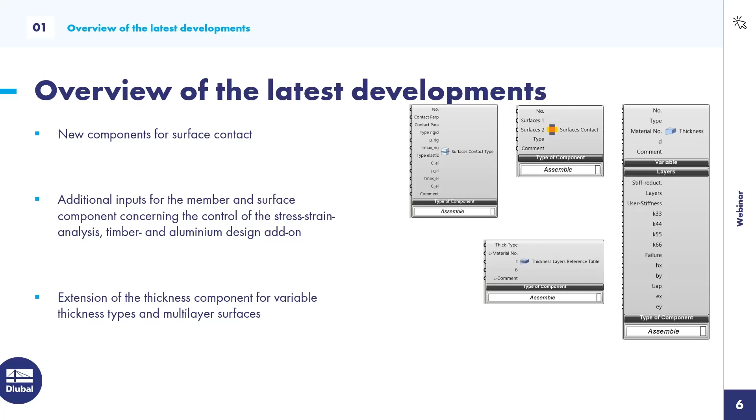The last feature I would like to show is actually related to the installation process of Rhino. Let me show you Rhino 8 here. In the past, the plugin could be installed via a specific folder in the RFEM 6 program folder. We changed it—everyone can install the plugin now via the Rhino package manager.

So if you go into Rhino and call up the package manager, you can search for Dlubal here, and you can see the Dlubal plugin with various versions. Important information: in case you're using Rhino 7, you should use the versions with the number 7 in front. And in case of Rhino 8, use the versions with the version number starting with 8.

For today's webinar, I'm using an internal version, but you can do the exact same algorithm in the current customer version of the plugin.

All right, let's switch to the second chapter of today's webinar, the live demonstration. To give you a feeling for what I'm doing in Grasshopper, I would like to show you the final structure first in RFEM, and then hop right into Rhino 8.

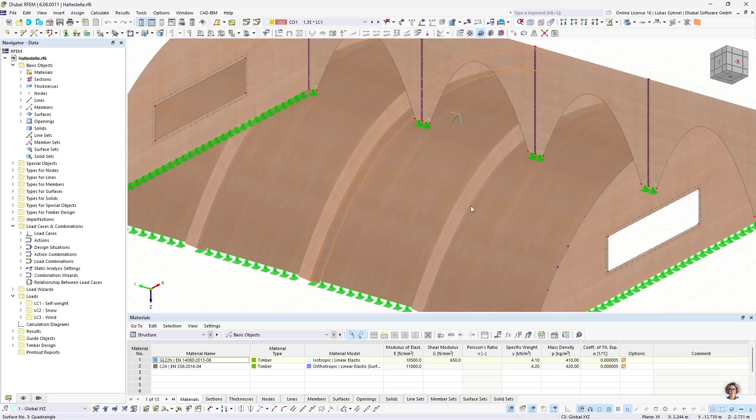So you have here these CLT wall, slab and wall elements, and inside some additional timber beams that support the roof, and on the front some openings to go to the train, and on the side some windows to see if the train or bus is coming. Obviously a made up example, but it serves the purpose of today's webinar.

I would like to show you the workflow and some new components. We have some line supports on the bottom, and additionally some line hinges, because CLT panels are usually connected hinged. So we need the line hinges as a tool here to have the proper force transfer.

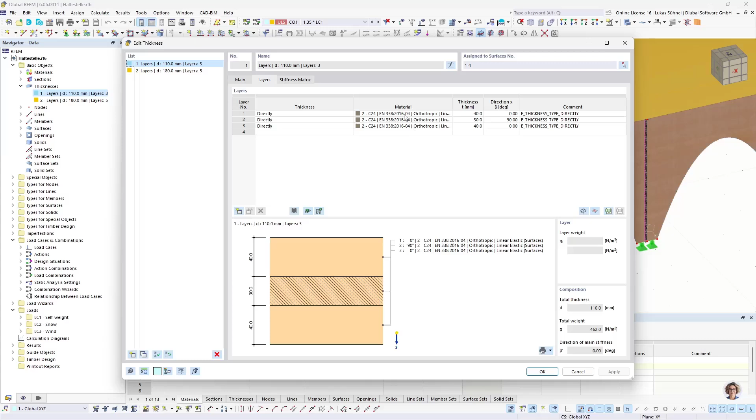That's also the most tricky part of this whole algorithm. I will explain it afterwards. Apart from that, we have, of course, our new layer thickness types in here, in which we then define the layers individually.

All right, that should be it as a rough introduction of the structure. Let's go right into Rhino 8, and here I will do it in a way that I put Rhino to the left and Grasshopper to the right in a second. One more little overview for you, what I will do now or in the next hour roundabout.

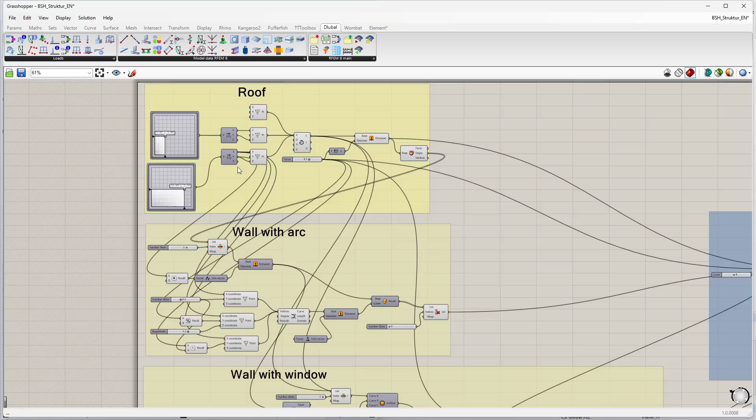I will model or create this algorithm here. We start with the Grasshopper algorithm, where I model the roof of the structure, then the walls with the arc, the wall with the window, then some data management, copying and so on of stuff, collecting my objects, the surfaces, the lines that I will use again afterwards.

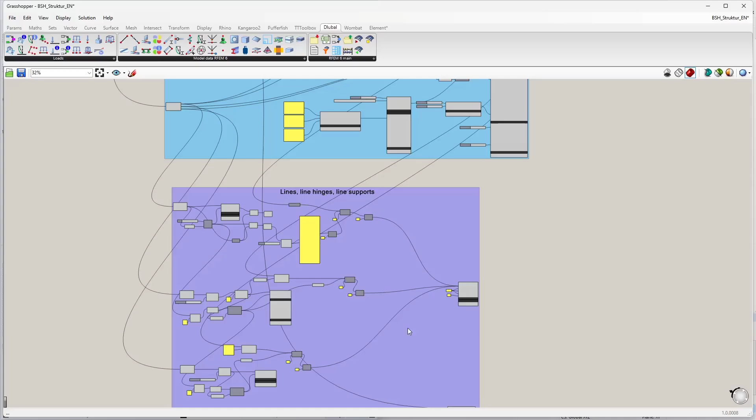And then the connection to RFEM via our Dlubal plugin. I will create materials, sections and members, thicknesses and surfaces, and last but not least, lines, line hinges and line supports. All of those components then will be connected with our export component, and we get the structure in RFEM 6.

All right, so let's create a new file in Grasshopper, move it to the right hand side of the screen and start with the modeling. As I said, I would like to begin with the Grasshopper algorithm. So I need a plan how to model that, and I will start with the roof.

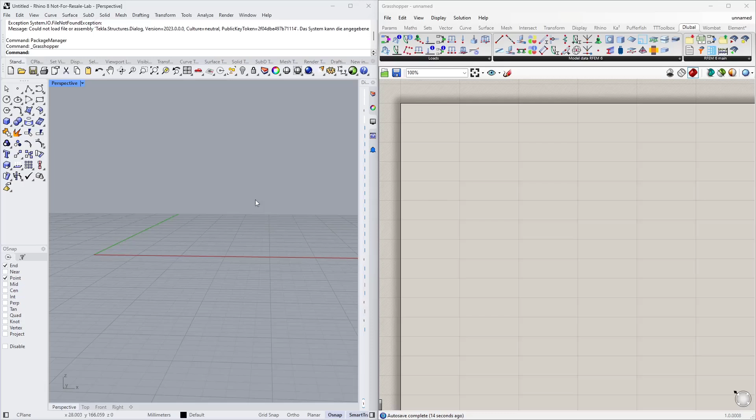The roof was curved, and therefore I need some kind of a curve with the interpolate component. The interpolate component requires the nodes. You can see it basically on this little icon here. You need to define the nodes and then it will interpolate a line or a curve.

And therefore I need 3 nodes and I use the construct point component for that. The coordinates of those nodes should be defined with MD sliders. This MD slider's properties will be changed a bit, so from 0 to 10.

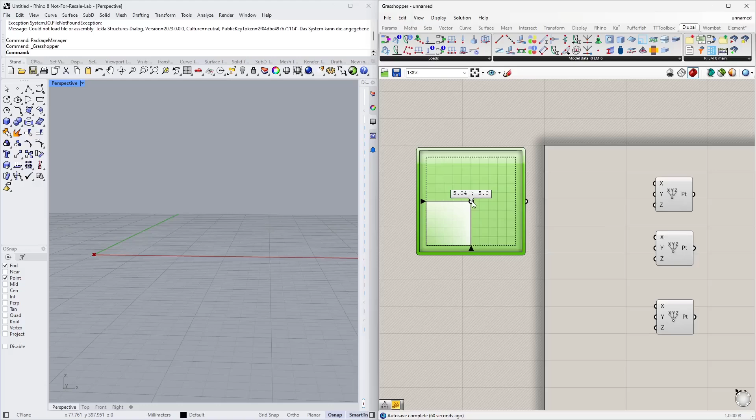So with this slider I can define basically a node, a coordinate x, y, z. Z, however, is always 0 here, so I change x and y coordinates by moving this little dot. Now my curve will be in the xz plane, therefore I need to deconstruct the node that I get here.

So I deconstruct the node and I construct it again, just using different coordinates. So x should remain as the x coordinate. The y coordinate, which I can modify here, should be the z coordinate. So you can see now, actually that's already the second node, my bad.

The first node should be at 0, 0, 0, in the center of origin. The second node, which I can modify now with the MD slider. And the third node should also be modified via an MD slider. Same logic, Y should be Z.

And now I can define this arc. Let's pick some proper coordinates. And now I can connect it to my interpolate component and I have a curve. So that could be the shape of my structure, for example. Now I need a surface, so I can simply extrude this curve into the y direction.

And yeah, I want to define a distance via a slider, so I define a slider from 1 to 5, for example, using the metric units here in my head. So now I can...

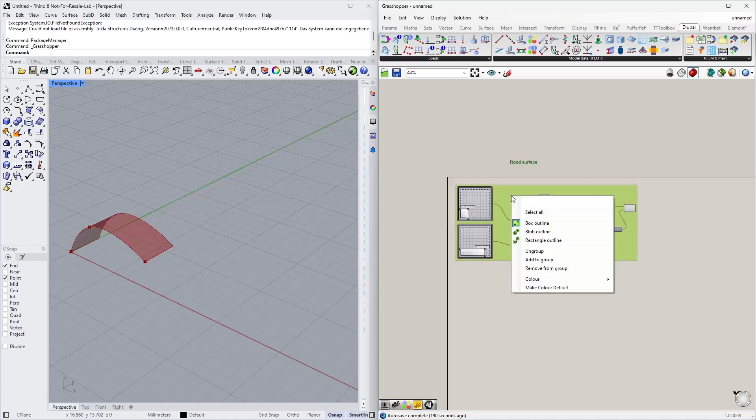All right, so second part is the wall on the front. Let me show it again in RFEM so you can follow easier. I want to create this wall now with the arc-like opening. So what I need for that is I need this line here, and I want to extrude it into the Z direction. To get access to this line, I will deconstruct that surface.

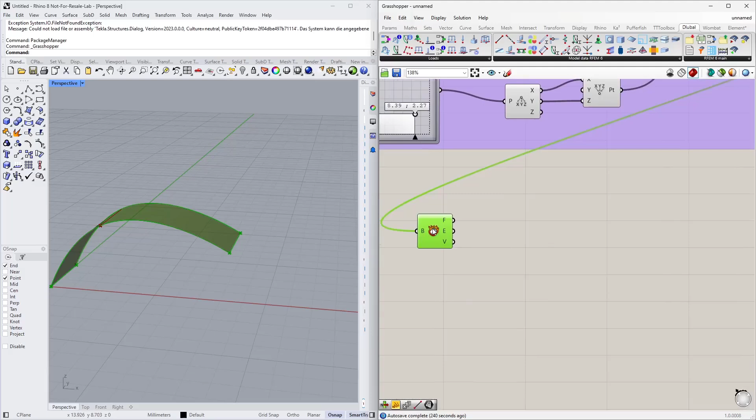Therefore I have here the deconstruct brep command. I link it to my surface. Now I have here the faces, the edges, and the definition nodes, and I need just one of these edges, so I take a list item component, connect it here, then define the little slider to select the line from that list. Let's see which it is.

Index 0 is the one on the end, on the bottom. Index 1 is this arc. Index 2 is the line that I need. Alright, so I have this single line in this component now, and now I simply extrude it again in the Z direction.

And we can already see it is the wrong direction. So I probably need to multiply it by -1, and the coordinate itself comes from my arc or my curve that I defined in the beginning. It's the Y component or Y coordinate of that node. So obviously the Y coordinate here, and multiplied by -1.

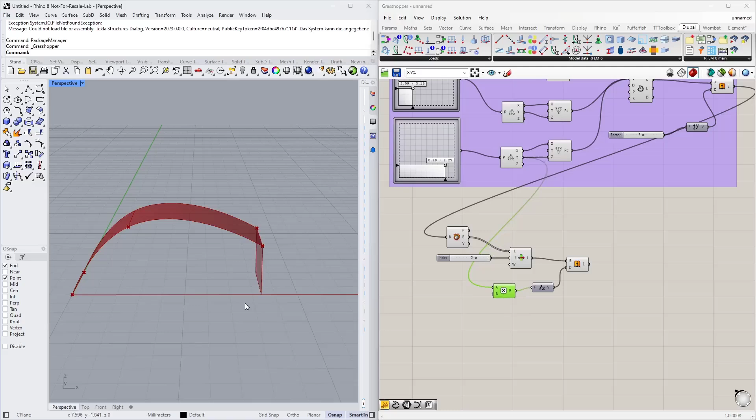So we make a little multiplication component, and then it always has the right height. Yeah, so even if I play with my MD slider, the wall always gets the right height at the end of the day. All right, that's the first part. Now I need the opening.

For the opening, I also use the interpolate component again, and I need again 3 nodes. All right. Yeah, sorting can be done at the end of the day. All right. So where should the first node be? Basically, all of the nodes have the same X location as the wall or the end point of my curve. So the X location or the X coordinate is always the coordinate from the last point of my curve.

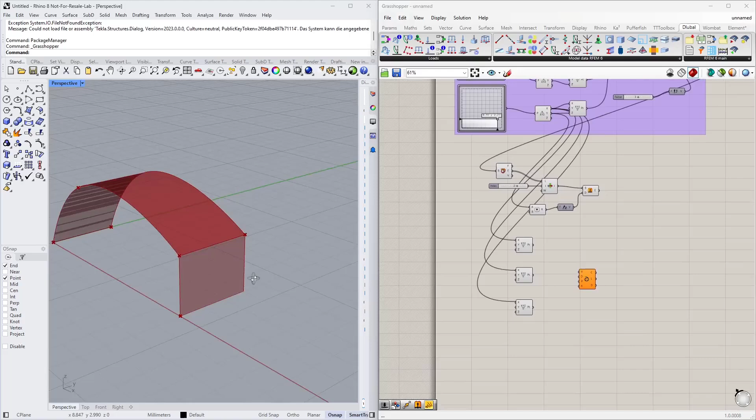And now I need to modify the Y and the Z coordinates. The first node should only move slightly in Y direction, so I make a small number slider, and I want to have floating points, so I change the type of it and connect it to the Y coordinate. So this distance that I define here via this node is basically the length of my wall support on the bottom.

The second point should be in the center. Center basically means the dimension of the extrusion divided by 2. So divide by 2. Link it to the length of the extrusion, and that's my Y coordinate for the center point. And I need a number slider to modify the Z coordinate. All right. Maybe also with floating points, so like that.

And the last point is again on zero, on the bottom of the surface, and it should have the same distance as the first point. So again, I just do a little subtraction. I subtract my required support length from the extrusion length. That's the Y coordinate. So whenever I change the length of the support, it will change on both sides.

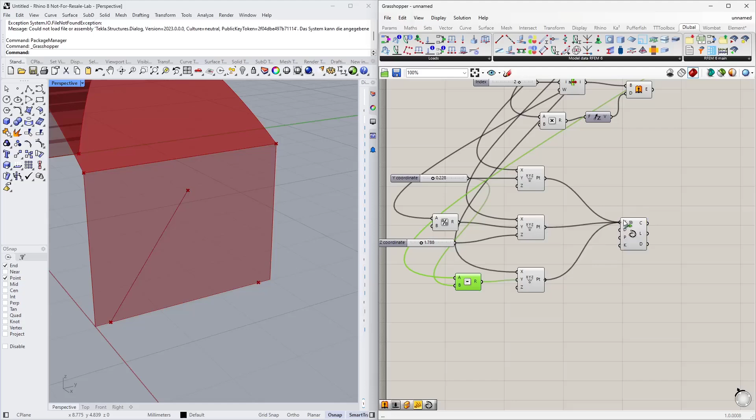All right, these are my 3 definition nodes for my curve. And now we can see it. The next step is, let's say, like a trim command. I would like to cut out this part of the arc from the rest of the surface. I can do that with the component split brep. The base surface is this one, and the so-called cutting shape is a surface. So I need to extrude my arc again into X direction to get a surface for it.

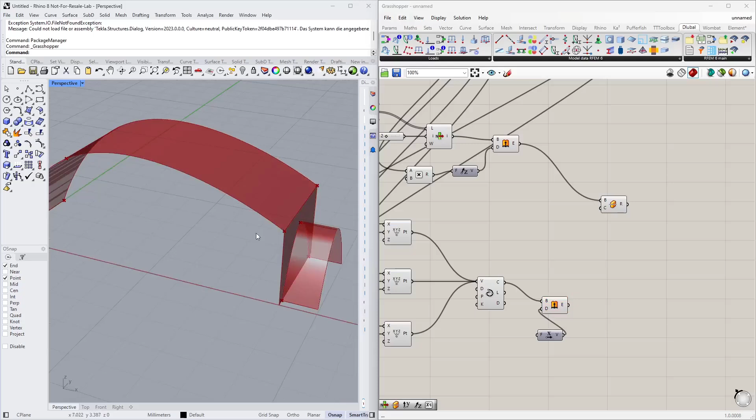So actually extrude first, extrude in X direction. Yeah, just any surface, and now I can use it to cut the original shape. I get here 2 surfaces now. I just need one of them. So again, a list command to pick one of those indexes, and a little slider to select the right one.

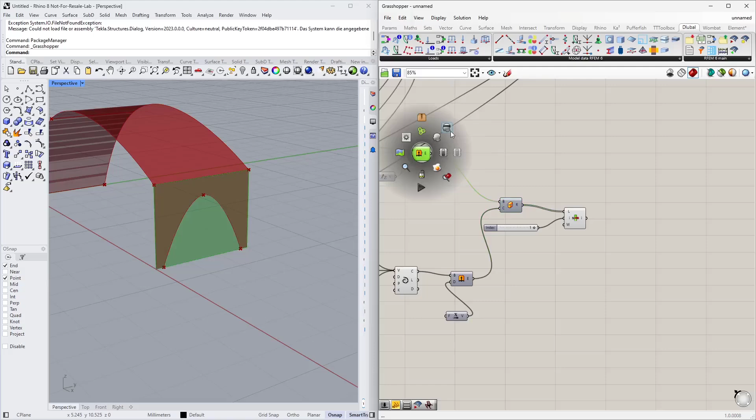So index 0 is the surface of the opening, and index 1 is the remaining surface, which I want to keep. Let me hide some of the other objects to see the result of my little algorithm. That's the remaining surface, the one I need for later.

So I already finished the second part here. Again, I could give it a name - arc, surface, whatever - just so I can easily understand what I'm doing even a couple of weeks later.

And now the last surface is the surface in the front. To create that, I would like to use the edge surface component. I only have to define the boundary lines. One of my boundary lines is, of course, the curve I defined in the beginning from the roof. And the second curve for my surface should be this side line of my front surface.

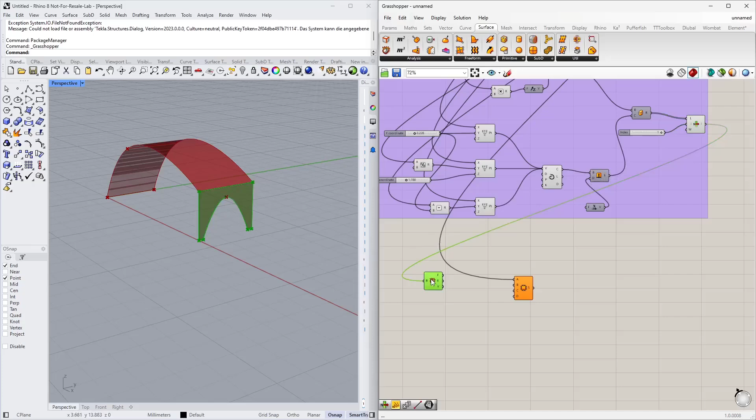So again, I deconstruct this surface here in the front, and I select, or try to select, this line here on the side, again with the list item component.

Let's connect a slider to it, and now let's go through these lines to see which of them it is. Oh sorry, the edge lines, of course. So that's the other side. Yeah, now I have it indexed number 2. That's the line I need.

So I connect it again to that surface component, and I already get the final shape. So far so good. Now I need to cut out a rectangular hole in here.

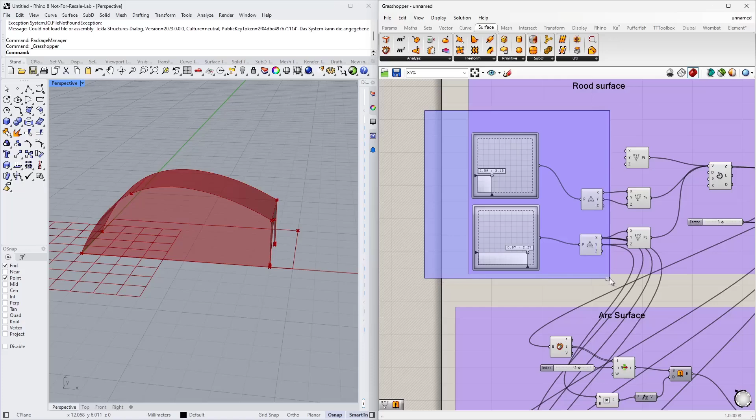Same logic as before. I will create the rectangle in this case by 2 points, A and B. Then I extrude the rectangle and cut it again from the original surface. These 2 definition nodes of the rectangle can or shall be defined again via an MD slider.

So I just copy some of those things here, copy, paste, and I will reuse it down here. This time, actually that's already okay. I can connect them as definition nodes for my rectangle.

The rectangle can be placed in any plane, as you can imagine. So I can define the plane by setting it graphically, or in the Rhino log, or however you call this area on top. And I would like to have the rectangle in this ZX plane. Okay, that's now in the right plane.

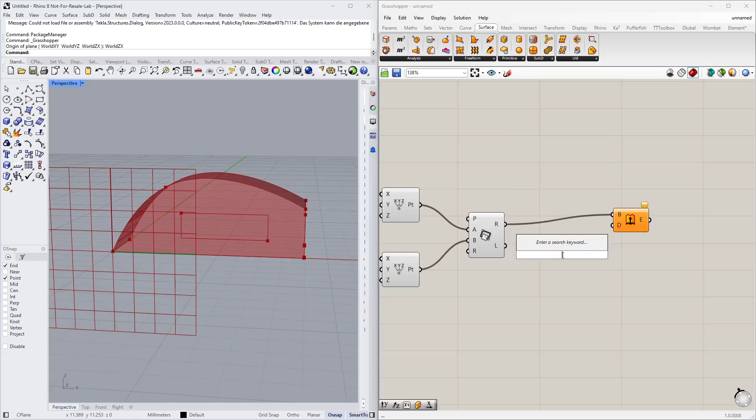Let's set some proper coordinates for the rectangle. So maybe that's the size of the window that I would like to have, and now I have my rectangle here. Again, I extrude it into the Y direction.

And now I can use the split command again, split brep, to cut out a hole. Let me copy the list item that I defined on top here. Again I want to keep only one of those surfaces, and this time I think it is index 0. Exactly, yeah. So let's hide some stuff to see the result of our work here.

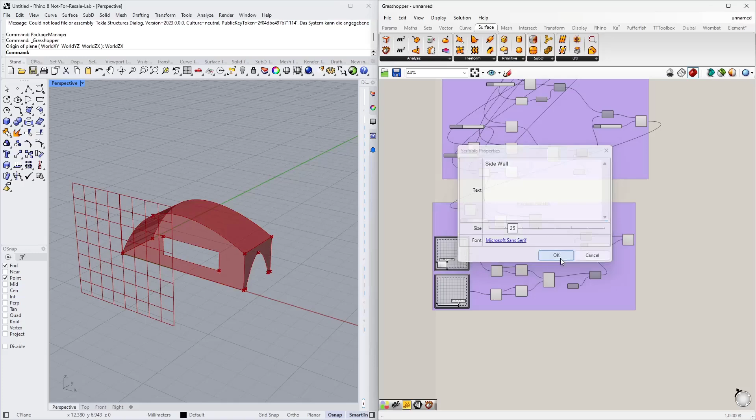That's the remaining surface with the opening, the rectangle opening. All right, that's already the basic geometry that I need. And now I can copy this stuff - sidewall, let's say. Okay, now let's copy the surfaces.

That can be done with the move command or move component. And which objects do I want to copy? Of course my roof surface and my front surface or front surfaces. And the default is set, as you can see. Yeah, it's copying it in the vertical direction, which is not correct.

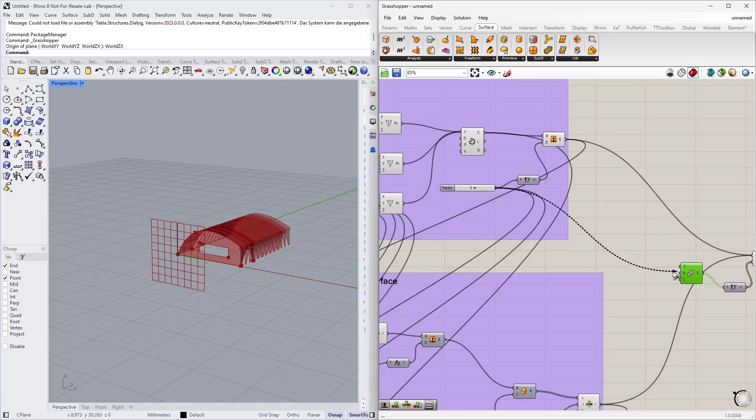I want to copy them in the Y direction, and I want to copy them multiple times. For copying something multiple times, you can combine a move command with the series component. And as a step, I would like to use the extrusion length, to have them placed next to each other.

Now I can control the amount of copies with a small slider - let's say 4 copies. All right, that's a big part of the structure. Now I only have to copy the front surface to the end, so I use another move command for that.

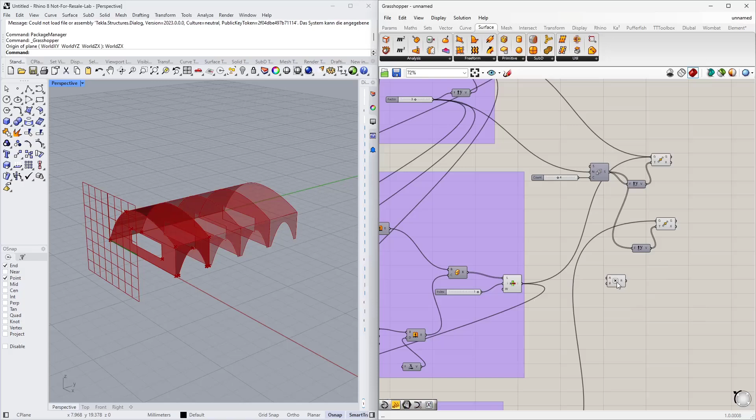I copy this surface—only one time, of course, not multiple times. The end distance for this is actually a little multiplication: we simply multiply the extrusion length with the amount of copies, and that's the length we need to copy it from the front to the end.

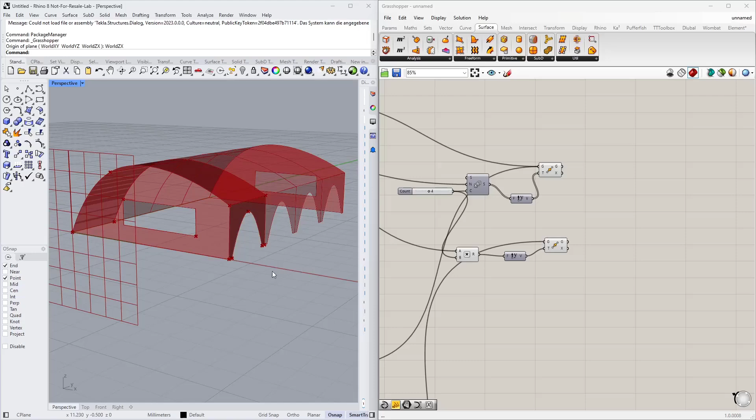Okay, so far so good, the geometry is done. What I need now is a bit of data management, because thinking of the RFEM 6 connection, I need a collection of lines on the bottom, all of those down here, because on those lines I'd like to assign a line support, and I can use these lines in my line support component to export it to RFEM 6 afterwards. Additionally, I need these 3 internal curves, because I want to assign a member or cross section to them, and maybe also a collection of all the surfaces that I have.

So maybe let's start with the curves for the beams. How do I get those? They are basically inside that component, which contains all the surfaces from the roof and from the front. Now, if we take a look at the data in that component, we see that it has 2 groups.

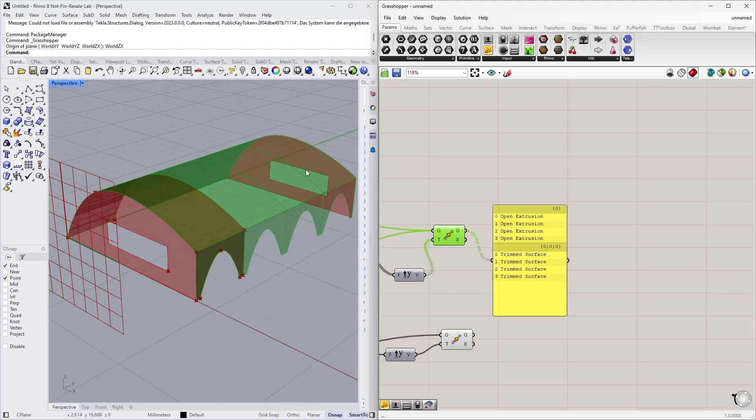Let's call it group 1, the 4 open extrusions—these are my roof surfaces—and in the second group, my wall surfaces. So what I can do here is explode this tree and get access to each of these branches. First branch, second branch. The first branch, as I said, contains the surfaces of the roof, and I can deconstruct them again.

So you can see it here again—those are the surfaces, and of course the boundary lines and so on. Now I would like to select only these internal curves, so basically just one of those lines per surface.

So I need again a list item component from my edges, and let's see which index numbers it will be. Index 0 is the lines on the bottom—I need that maybe later for my line supports. I'm looking for the roof curves, and index number 1 is the one that I need. It contains these curves, however it contains 4 and not just the 3 that I need.

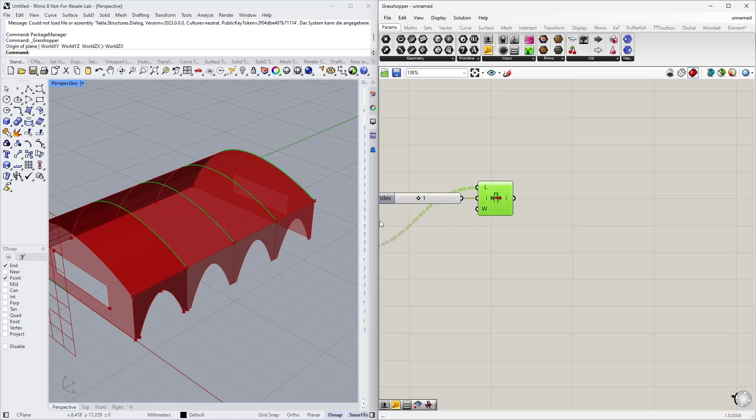So what I can do now is get rid of the last index from that list. Currently it is not a list, it is, let's say, a tree—on each branch of the tree I have 1 curve, but I can make a list out of it by flattening this tree, and now I remove the last index.

And it can be done by using the cull index component. The last index can be defined by a panel with the -1 value, and the remaining lines are the ones that I need for my beams.

So let me collect that in an additional component so I can easily reuse it afterwards. Maybe again a little comment here: curves for beams.

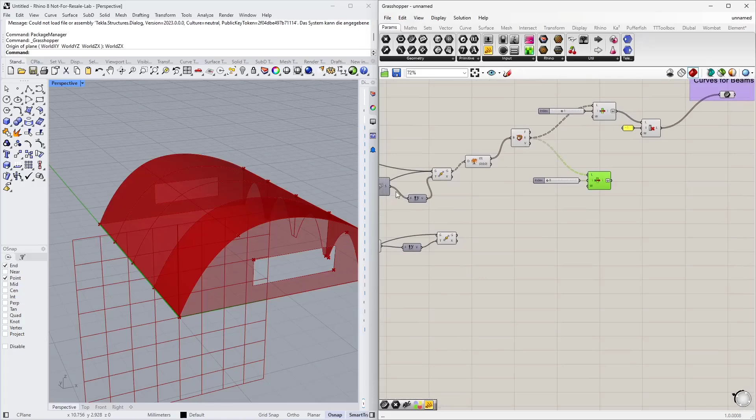Now, the second part should be the curves for my line supports. We already saw it in that component—here I can select, let's say, the curves on the bottom of those roof surfaces. It was index 0, so that's already one part for my line supports. And the other bottom lines are included in the wall surfaces.

So basically I can copy this part, connect it to my surfaces here in the front, and now look for the index number of those walls—which of those lines are the ones on the bottom? So I scroll through that: index number 1, as we can see. Now my slider isn't long enough, but I can tell you that it's index number 5. So I need index 1 and index 5.

So I create a little list, 1 and 5, and connect it to that component. This list item gives me now 2 lines, index 1 and index 5, and hopefully you can see that it's the line on the bottom, on the right and on the left side.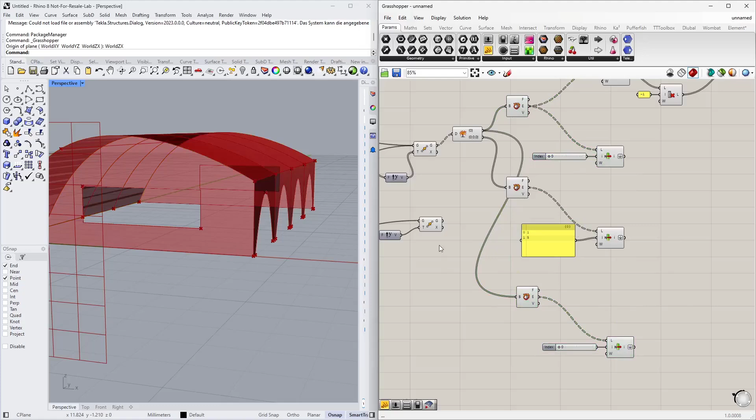Now I need the bottom line from the side surfaces. Same procedure—I copy this part again and connect it to my surfaces: the front surface, which is down here, and also the copied surface from the back. From both surfaces I need 1 line.

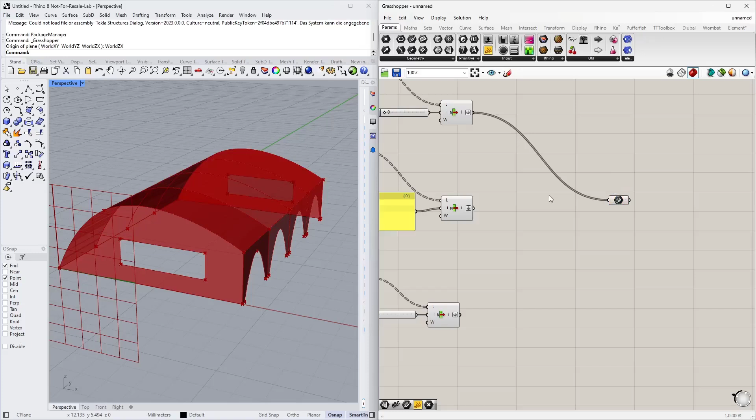We can already see it is index 0, so in here I have now 2 lines, and these are the lines that I need. I can collect all of them in one component again—just connect them to the curve component, and that component now contains all the bottom lines for my line supports. So again, give it a little description: line support lines.

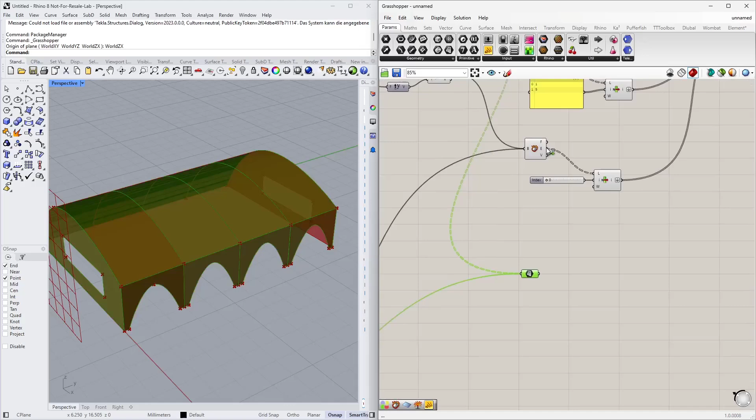I also collect my surfaces in a surface component, which contains most of them, where I copied them. Additionally, I have the front wall and the wall on the back, which is in here. So this surface component now contains all surfaces.

So far, so good. Now, the next part is the connection to RFEM 6. For that I need my Dlubal plugin. Let me open Grasshopper for a second.

The Dlubal plugin will show up after you install it, and it is divided into 3 parts. We have the model data group, which contains most of the basic objects: nodes, lines, members, surfaces, materials, sections, also components for solids, for thicknesses, supports. I think most of the stuff that you need is implemented in here.

We have another group called loads. In here you have components to create load cases, load combinations, but also the loads: node loads, line loads, member loads, surface loads, but also imperfections, in case you want to assign them as well.

And the last group contains general components, for example the export component, import component, a component that allows you to run the calculation of RFEM 6 via Grasshopper, or other components. For example, I use in an internal version the global mesh setting component.

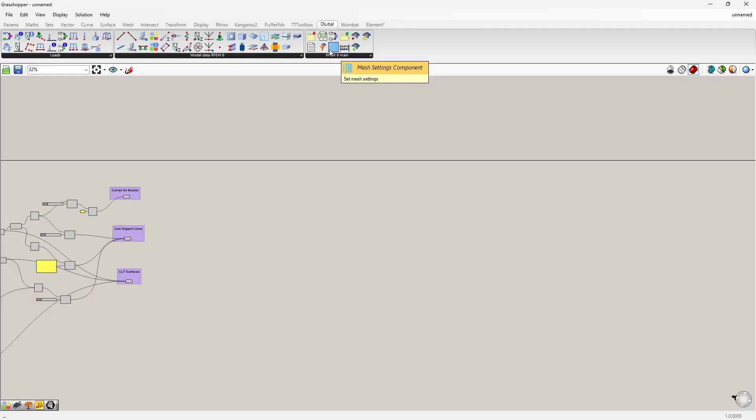All right, how do we start? I think RFEM gives us a nice hint here. The data navigator in RFEM shows us the basic objects and then specific object types for nodes, and it's kind of the logic that you use when defining your structure.

First you define materials, then the sections and the thicknesses. Then you continue maybe with members and with surfaces and solids and so on. And the same logic we use in Grasshopper.

I start with the definition of my materials and sections. The material component can be found here, and a material can be defined by the index number that it should get in RFEM 6 and the name.

The name ideally equals the name of this table down here, so you can define your material in RFEM and copy the name. By the way, to get the full name, check the program options and see if you have the full section and full material description activated in here.

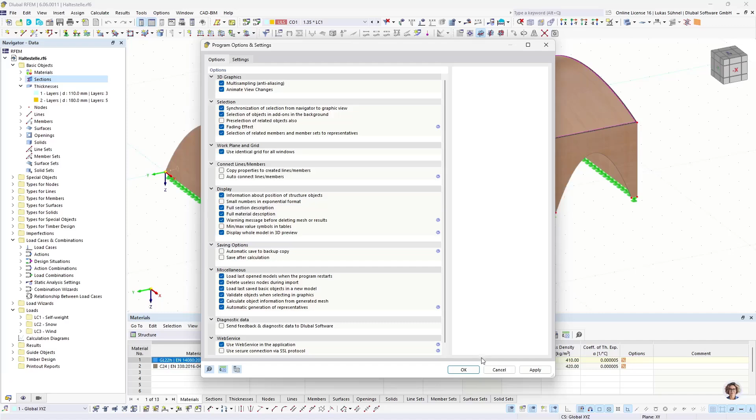If you do not have this option activated, you only see GL22H — the code-related part of the name will not be shown. But to have a clear assignment of a material, you also need the standard. So we can copy that name and paste it into Grasshopper.

Alternatively, if you had previous projects and already defined materials and sections, you maybe already created a little library of materials and sections that you use again and again. And that's what I did.

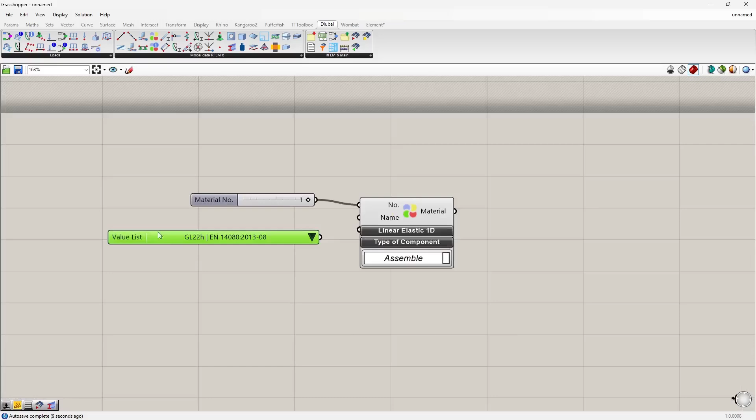I defined here a value list and put my own information into that value list. You can do it by editing this value list and inserting the names into it — that's the name it shows here, and that's the name which is behind that little description. It's identical for me here, but you can simply copy these things.

Then you select the material that you want from that little list and assign it to the name input. And that's all you need to do.

I copy my material — I need a second one. Make sure you change the index number. Then I select here the material C24. The first material is for my beams, and the second one should be for my CLT surfaces.

And for surfaces, we have to use the orthotropic 2D material model, or that's what I want to use at least. So I use a value list to read the options of this material model input and select orthotropic 2D.

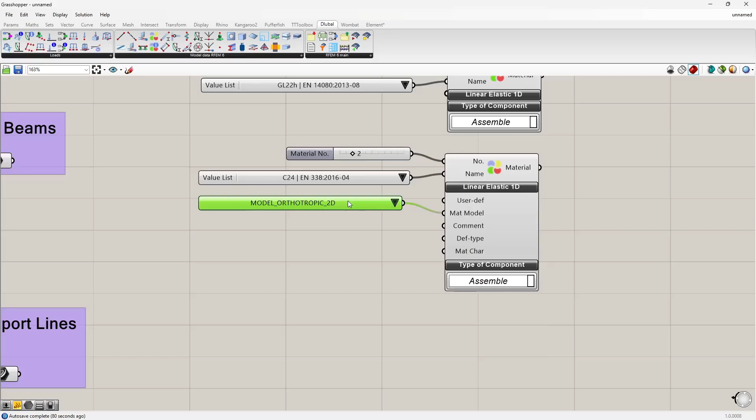All right, next step should be the definition of a section. So we have the section component for my beams. Again, I assign a name, a number, and I have to assign a material and the name. The material I can link directly from the material component to the section component.

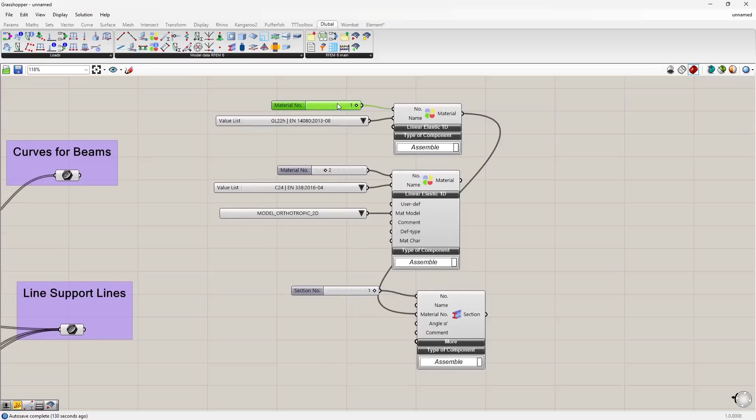This step can only be done if I define the index number first, because what we expect in this section component is the material index number, 1, 2, 3, 4, 5. To transfer it from that component to this one, I have to assign it here first. If I don't assign it, this connection won't work. That's why, personally, I define usually all these index numbers for all my components, so I can link them together. Now the last thing is the name.

The name is quite easy. It's RM1, rectangular massive section, and then the width and the height. I could copy the string and paste it into Grasshopper, or I build it parametrically. The name is just a bunch of strings combined, basically, text brackets, and the name consists of the part RM1, then a value for the width of my section.

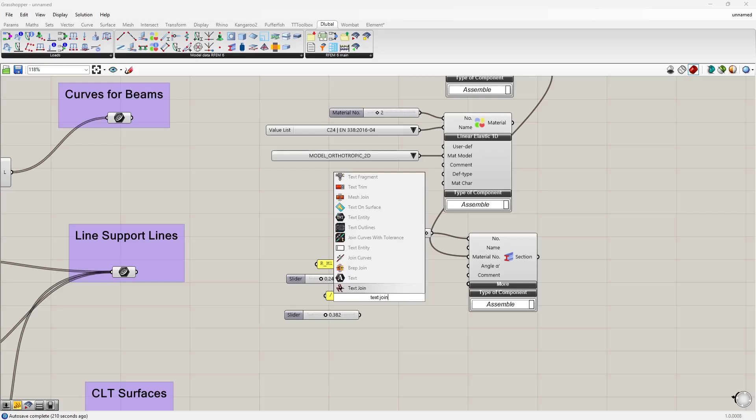And I use here a slider from 0 to 1, I'll explain it in a second. Then the next part of the name is the slash, and then another slider for the height of the section. All these parts of the name can be joined by a text join component. You just plug it into this input here, and you get the name, or you get one string out of it.

Let me show it. Here we are missing the space. Okay, so that's now the name according to RFEM. There is just one little difference: you can see here I'm using, let's say, meters, in my mind 0.24 meters, and not millimeters as it is shown in RFEM. This has the following reason.

The Grasshopper link is based on our web service, on our API, and this API expects SI units. So I have to define the dimensions of my sections in meters, so that I get the right size in RFEM. Therefore a scale between 0 to 1. Now I can link it to my name input, and the section is done.

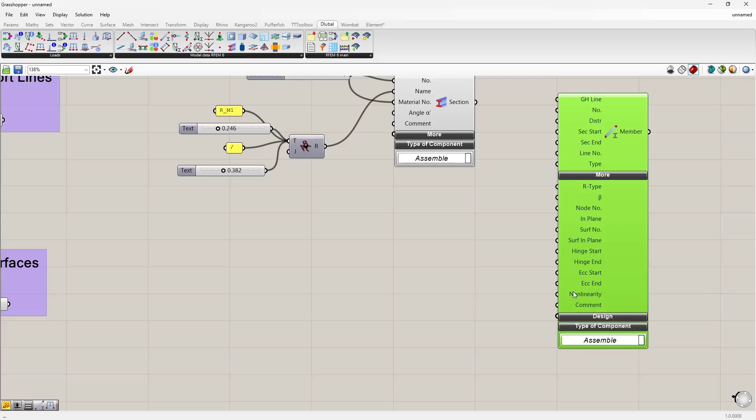Last step for this first group is the member component. Let me show that too. A member component with some basic definition inputs. Under 'more' you can find options for hinges, eccentricities, nonlinearities or rotations for the member, and under 'design' related inputs. Let's start at the beginning.

I need the Grasshopper lines for my members, these 3 lines. Let me rotate the structure. These are the 3 beams, and I already collected them in here. These are the curves, and I connect them to my member component. The section should be this rectangular section, and that's basically it.

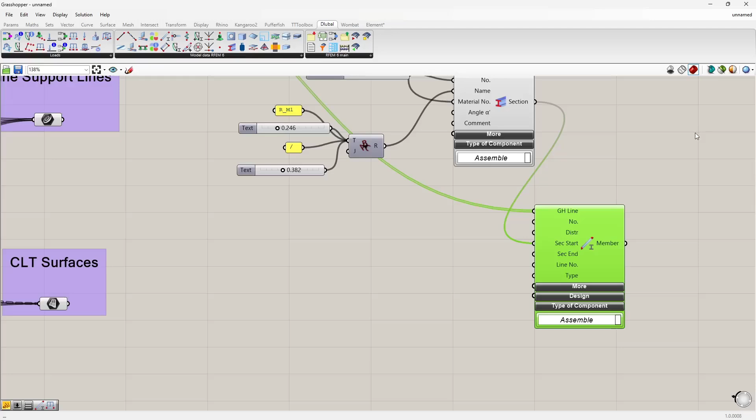There's just one thing I'd want to define in the member, related to the design. I have timber beams, and I would like to feed already some timber design related settings, so that when I export it to RFEM, I have most of the information already defined for the design, and I just have to calculate it.

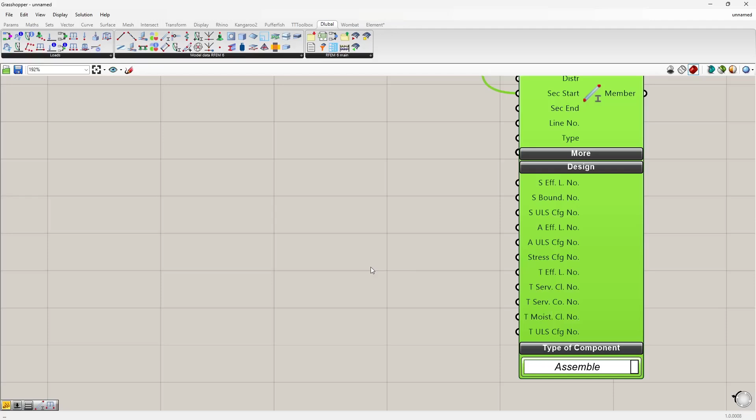So I have some inputs here, S usually for steel, A for aluminum, then T for timber, and for timber I can define the type of the effective length, or the index number of the effective length type, and the index number of the ultimate limit state configuration, or the index number of the service class. I can't define these classes in Grasshopper, but I can define the index number of the existing type.

And now you may ask, which existing type? We never defined them. That's where the templates come into play, and I will explain at the end of this webinar how it is working. So let me define these types. I used index number 1, and again, more details I will show at the end when I explain templates. So that's already my first part.

Let's group it: materials, sections, and members. Now the second part for my connection to RFEM are surfaces and thicknesses. Let's have a quick look again at RFEM.

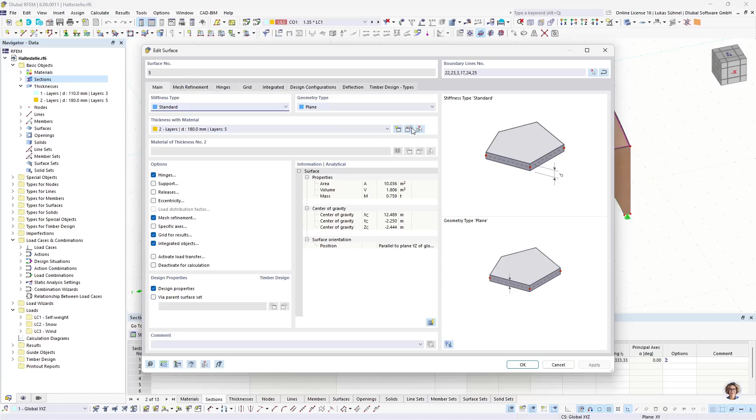So a surface consists of some main inputs, usually the thickness type: what material and which thickness is defined in here, and it will be assigned to the surface. So let's have a look into the thickness type itself. Here we have different types: uniform, for concrete slabs, uniform thickness type, variable, and also layers. In case of layers, we have a table included where we define each layer, the material, the thickness, and the direction of this layer.

Okay, that's what I have to define here, or in Grasshopper. So let's start with the thickness component, which we have here.

And the thickness component again needs a number or an index number. Then the type, I can use the value list for that. In 99% of the cases, the tooltip will tell you what kind of input is required. You can see it here, value list. So I connect it.

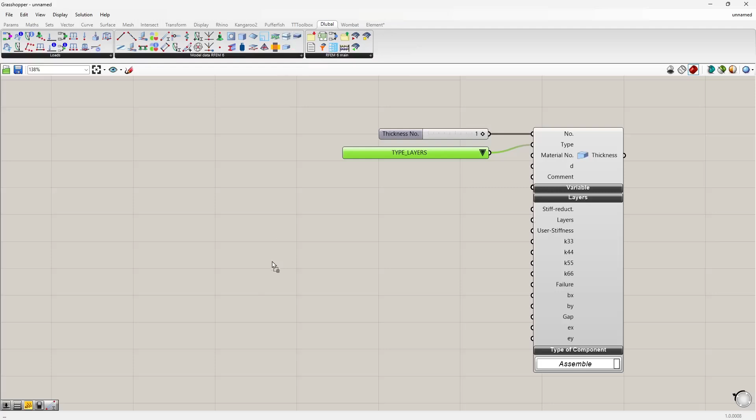And I can select here layers. In case of layers, I can open the layers tab in this component, and here I have the layers input. The layers will be defined in an additional component. Yeah, we had to split it up.

So in that additional component, I define the material, the thickness, and the direction. Yeah, this little table that I displayed in RFEM 6, this information will then be transferred to the thickness component. All right, the material should be material number 2, C24, orthotropic material model.

The thickness can be defined in a little table. Let's say 0.4, 0.3, again meters, 0.4. And that should be a list.

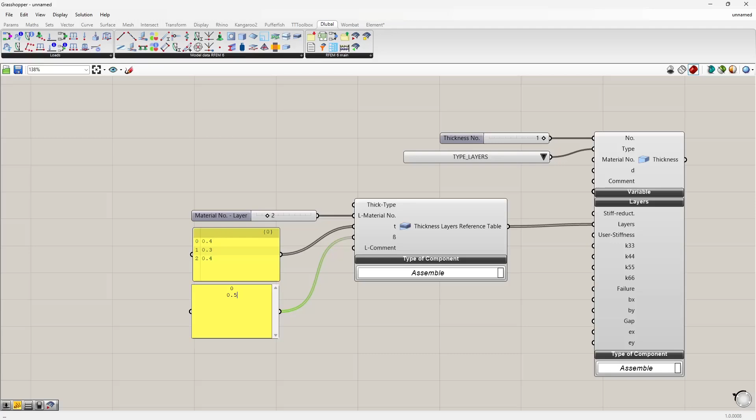And the same logic for my rotations. The direction of each layer should be 0, 0.5 multiplied by pi, 90 degrees, and 0 again. This is this little subtable which I showed in RFEM, and it is connected to the thickness component.

We have a lot of additional inputs in here. I can show them as well in RFEM. I do not use them today, but in case you want to apply a stiffness reduction to these CLT thicknesses, you can activate them with this button, and then you have access to these modification factors and additional options, and all of them are included in our component, as you can see here.

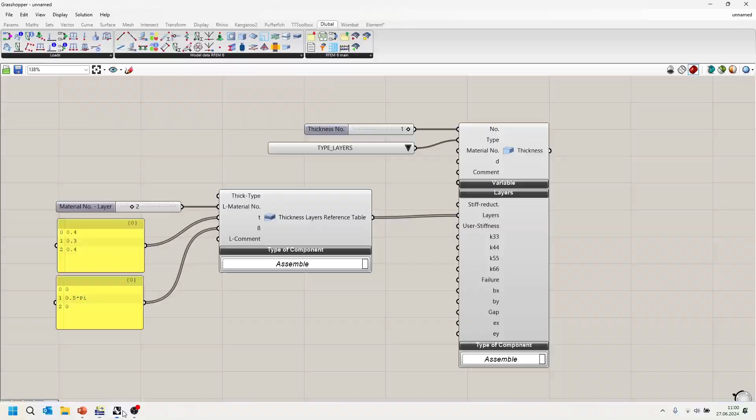So that's the thickness that I want to create. Now I need to connect it to a surface component, and the surface component expects additionally the Grasshopper surface.

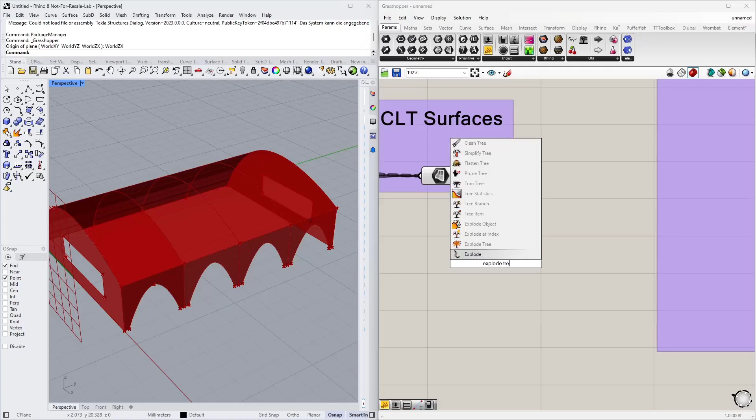Now I want to use that thickness type for the roof surfaces. That surface component here, let me show it again like this, contains all surfaces, again in a tree-like structure, as I showed before. There are 3 groups. My roof surfaces are in group 1, so what I will do here is explode the tree that I have, and use, since I need it later as well, the surfaces from the first branch for my surface component.

The last step here is the numbering. As I said, I tend to number all my surfaces, so that can be done with the series component. This number, the index number, starts with the value 1. So I define here the start index number as 1. The step is of course 1.

1, 2, 3, 4, and the amount of index numbers that I need is linked to the length of this list. I have here 4 surfaces inside, depending on how many copies I create in my Grasshopper algorithm. So the length of that list is basically the amount of copies that I need. I can count the length with the list length component and connect it here to the amount of copies. And now I get a list of 4 index numbers, 1, 2, 3, 4. That's what I need for my surface.

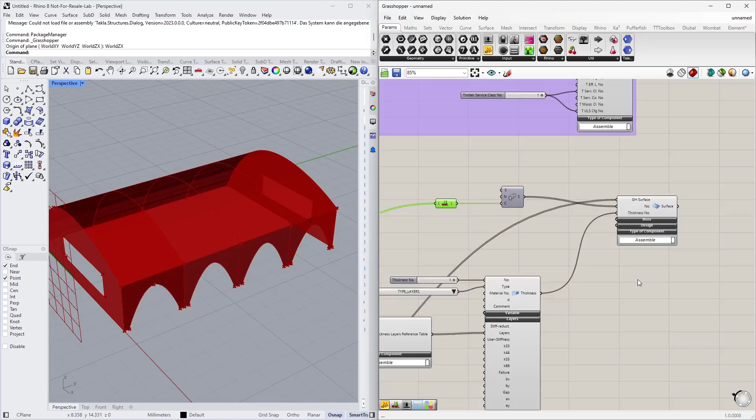That's the surface component. And now I need another surface component for my walls. So I simply copy all this stuff. Copy paste.

This time I want to use the remaining surfaces, so these are my front surfaces and these are my surfaces from the side, and I connect it as Grasshopper input.

Concerning the thickness for the walls, here I would like to use 5 layers, so I simply copy them. Okay, same for the directions.

And I need to change the index number, obviously, of my thickness. Yeah, that's the second thickness, so index number 2.

Again, the remaining part is the numbering of those surfaces. I will use a series component again, but I'm not going to start from index number 1 as I did before. I need basically the last index number from this numbering plus 1. So that's not difficult. The last index is basically, I can read it via a list item component, and I select here the last index, using -1.

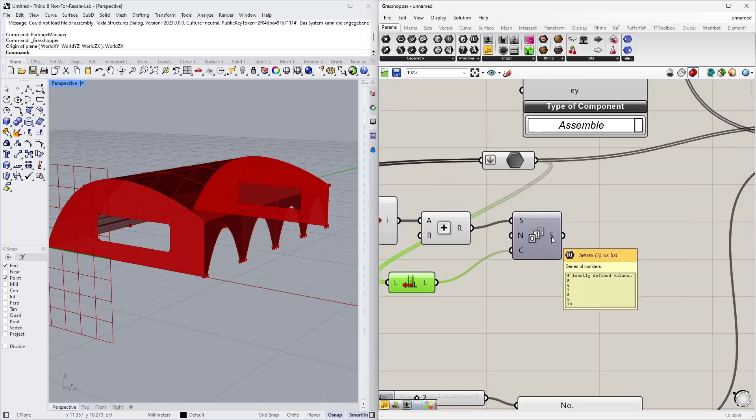Here it is, the length of that list is again the amount of copies that I need. So I have here the numbering 5 to 10. That's exactly what I need. 6 values for the numbering, 6 surfaces.

That's good. All right, one more thing I would like to define here is a mesh refinement. Why? Simply because the default global FE mesh length is 0.5 meter. We have here a distance of, what did we define, about 0.3 meters. So let's have at least 3 elements over this length here. I would like to use an FE mesh for those wall surfaces, an FE mesh length of 0.1 meters.

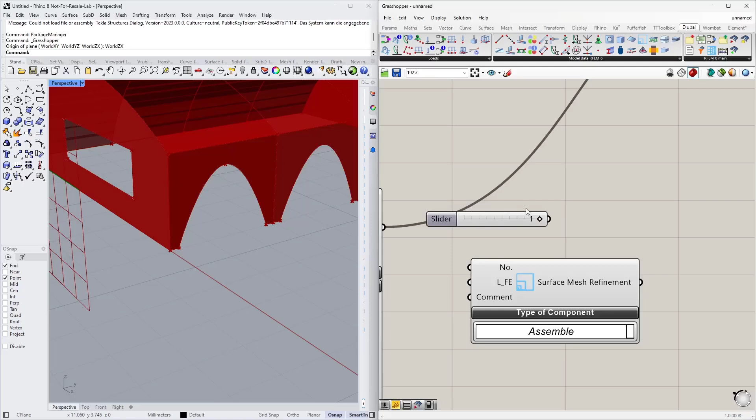Therefore, we have these mesh refinement components. Here's the surface mesh refinement component. I assign the index number and the required length, 0.1. All right, and I simply connect it to the mesh input.

Now, what I forgot also on the surface on top is those are timber surfaces, obviously. And again, I would like to define some things for the design afterwards, the service class and also the ultimate limit state configuration. Therefore, I assign here type number 1 for the ULS configuration, and the same here. Let's extend the design tab: ULS configuration, service class. All right, explanation will follow afterwards.

Now, this is the second big group for the connection to RFEM 6. And now the last part, which is related to the line hinges. This is the most tricky part, I would say, in that example. So let's have a look inside RFEM, how they are defined.

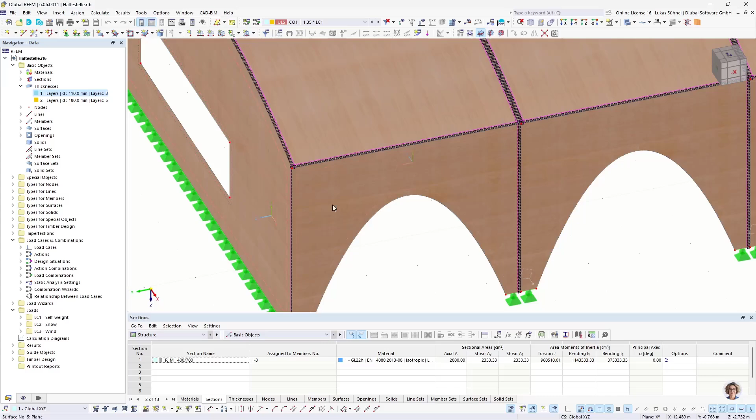Line hinges, as I said, control the force flow between surfaces. And we find them under types for lines, line hinges. Let's have a look. I have just one type here for all of the surfaces. And what we can control here is the hinge conditions, which force should be transferred and which not.

In my case, I simplified it a bit. I say it's just free about the rotation of the local x-axis. So basically along the line hinge, the rotation about this axis should be free, and the rest should be fixed. And then, which is easy to define in Grasshopper, that's not the deal, not the issue.

The difficult part is this string on the top here. How is it set up? It is set up in a way that we have the index number of the surface where we want to have a line hinge, and then the related lines. So for surface number 1, lines 2, 3, and 4.

For surface number 2, lines 6, 7, and 8, and so on. And this is split by a semicolon and a space, and then the next group of surface and lines comes. So somehow I have to build this string in Grasshopper, and therefore I need the index numbers of my surfaces and of my lines where I would like to have a line hinge. So let's have a look again at Rhino and Grasshopper.

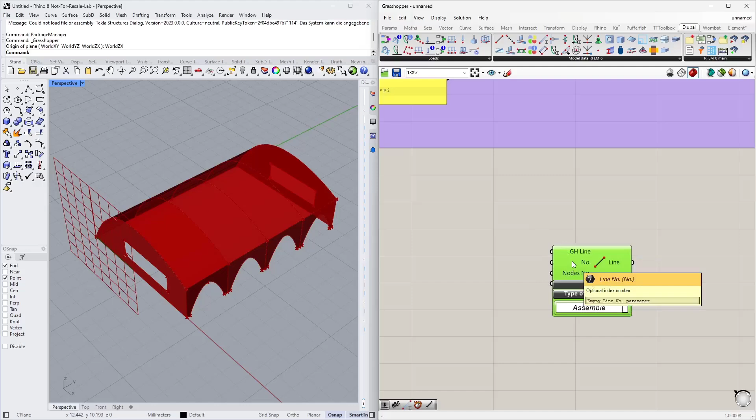The lines for the roof are included in the roof surfaces, I did it multiple times already. I can deconstruct those surfaces, I get my edges out of them, or I get here the edges of those lines, and I can simply say these edges should be numbered, starting with index 1 until the amount of lines that I have here. So I need a series component.

The series component, or the number, should start with index number 1 again, and the amount of copies depends again on the list, or the length of this list. Let me show it quickly.

I have here 16 lines, but grouped again. So what I will do is make a list out of that group, using list length. I want to use this list, however I flatten this tree to get a list, and the last index, 16, I will use for the count. So I get the values 1 to 16, which are my index numbers.

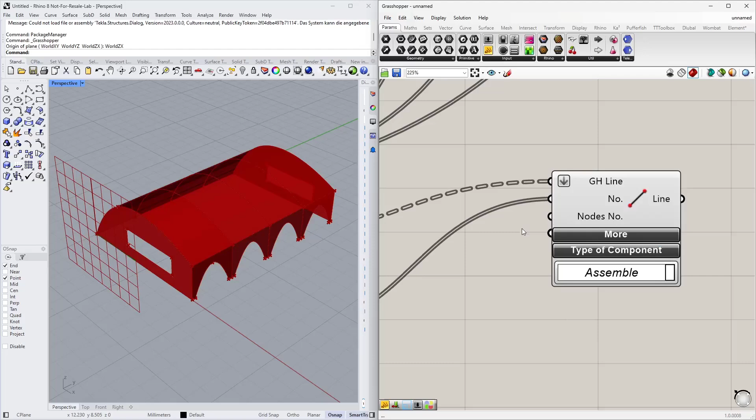Sorry, wrong input, here number. I also flatten this input for the Grasshopper line because I need to combine list and list, otherwise I will get more lines afterwards. So I have to combine a list with a list.

So far, so good. All my lines from my roof surfaces have an index number now. And now I somehow need to combine my surface index numbers with my line index numbers. How can I do it?

I can do it maybe by collecting the numbers of my surfaces again down here. This series component, if you remember, contains the 4 index numbers for my roof surfaces. So let me simply bring them down here. Again, I have the same list now here. Let's have a look how the values are shown. I have here the list with the 4 values, and here my 16 index numbers for my lines.

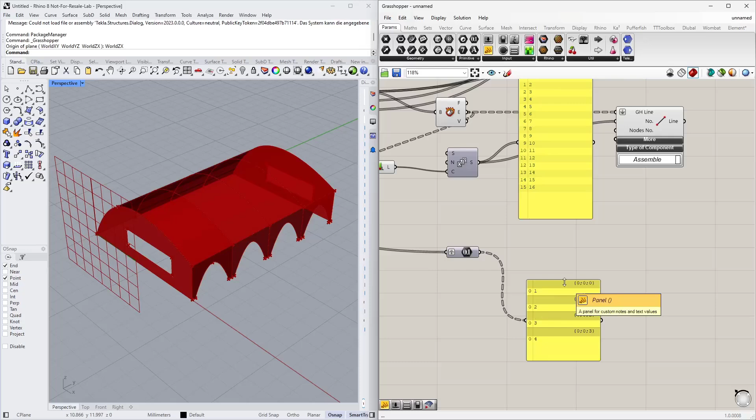If I want to group them so that I always have surface 1 with related lines, surface 2 with related lines, a tree-like data structure would come in quite handy. So what I can do is graft my numbering into a tree. Each index number will be transferred onto its own branch.

You can see it here now. Each of these branches from my tree has one value, so I have some kind of grouping now. And the same grouping I need for my numbering, for these numbers. I would like to have the lines related to one surface in one group.

I have it already somehow, here. Each surface has these 4 lines, or they are grouped, let's say. And this grouping I would like to assign to my numbering here. How can I do it?

I can deconstruct the path - deconstruct the path that I just showed, where the lines are grouped. And then I can unflatten a tree from these numbers. And then I trim that tree.

And the result will look like this. I have now these numbers, which were in a list before, grouped similarly to my surfaces, as you can see here. So now I can combine the first branch, the first surface, with the related lines from the numbering. But before I do that, I have to get rid of one of those index numbers.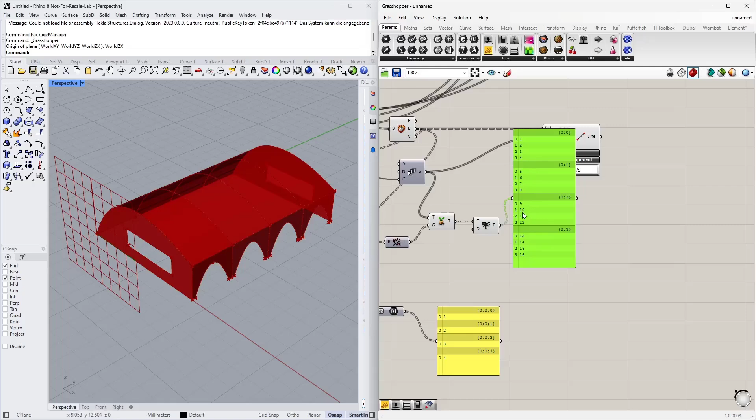Because I want to define a line hinge, or let's say differently, I do not need a line hinge on the bottom lines. I have a line support down here, so there's no reason for a line hinge. So I get rid of the index number 0, which is always the bottom line for each group.

Easy task, cull index. So we remove one index from the list, the index with the number 0. Now only 3 lines will remain here.

And how can I build the string that I need for my line hinge now? I can use the text join component a couple of times actually to get the desired result. The first thing I will do is get these index numbers, the line numbers, in a string split with a comma, not in a list as I have it here.

So I join them, and each value should be divided by a comma, I guess. Let's see the result of that: 2, 3, 4, 6, 7, 8.

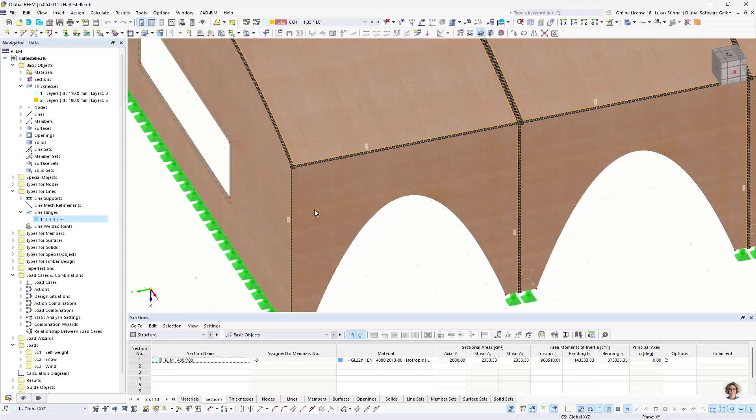Surface 1, line 2 to 4. It doesn't matter if we have here 2 to 4 or 2, 3, 4 - RFEM will accept our description method. Now I need it in one long string, so I will flatten this result and join it by a semicolon and a space. Now the result looks like this, and this is exactly how it looks in RFEM.

So far so good. Now let me use a line hinge component, assign a number to it, assign this string that I just created, and define the connection. I would like to fix all forces in each direction and release the rotation. You get the information as a tooltip here. Free rotation is defined by the value 0. Rigid means, or can be defined by inf for infinite, and any other value will be in Newton per meter in case of a spring.

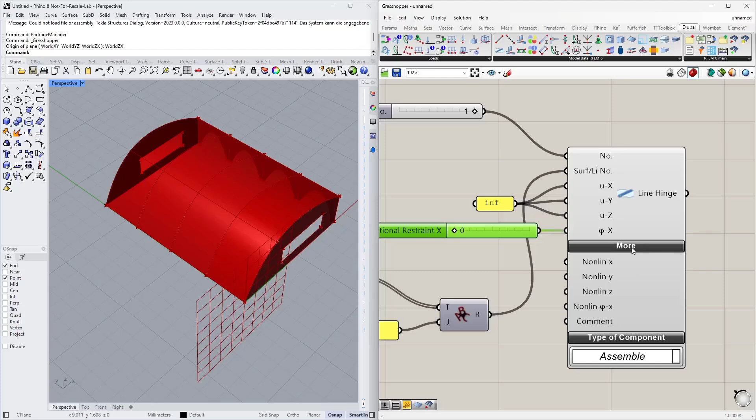That's all regarding the line hinges. By the way, we also have non-linearities for that, so always check out the more option if you're interested in additional settings. Due to the time, I have to stop here.

I will not continue with the line hinges for my walls, but it's the same logic. You need to number the lines where you would like to have a line hinge, group it as I did here, and then you can create this string, assign it to the line hinge component, and you get the line hinges on the desired locations.

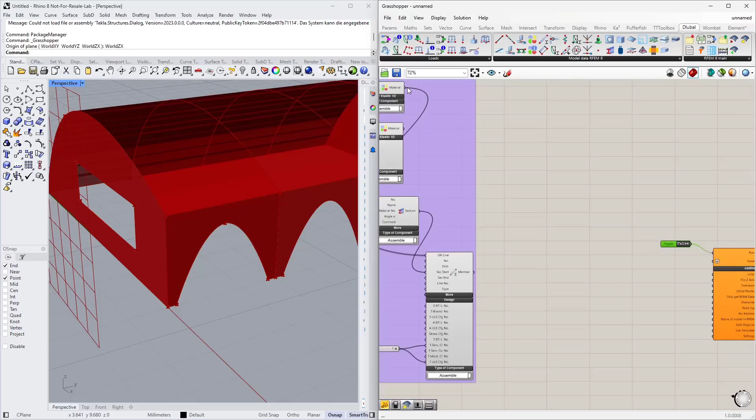If you did all that, the next step would be to connect it to an export component - we have it here, that's the export component. Which inputs are required for that? I tend to use a Boolean toggle to run the export. I set it to true if I want to start the export, and if you leave it on true, it's like a live link - whenever you change something in Grasshopper, it will trigger another export, or you just set it back to false to stop it. The input is basically the connection between all our Dlubal components, so each of these Dlubal components have to be connected to the input.

I will skip it here because I will switch in a second to my final example, but you can imagine what you have to do here. Then we have some additional options: flip the z-axis, which I usually use again via Boolean toggle, because the global z-axis in Rhino shows upwards, while in RFEM, at least in my case, downwards. So I flip the z coordinates here.

What else do we have? We can define the name of the file in RFEM after the export - let's say, example. So if I export it in that way, the RFEM file will be named example afterwards. The last feature that I would like to show here is the use template function.

I mentioned it a couple of times when I defined my members or surfaces, and it's quite a strong tool I would say. As you probably noticed, not all of the data that we have in RFEM, all of the objects, can be defined in our plugin. We are working on that - you saw it in the beginning, we extended a couple of components, we defined new ones, but not everything is included in here already. If there's something missing, then you can't use it, obviously.

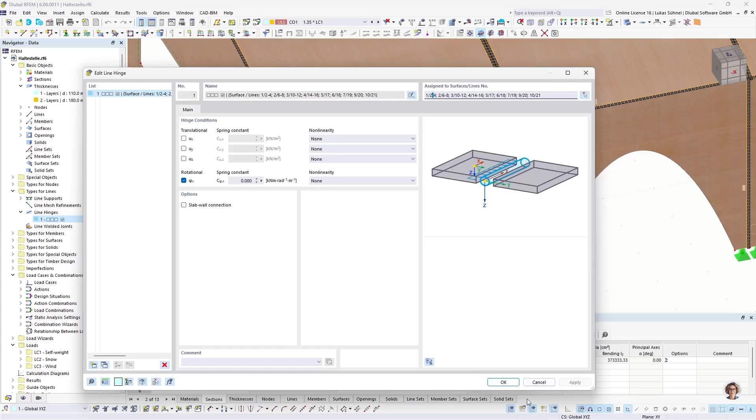But we thought, okay, maybe it would help if you can use a template from RFEM. What's that? Let me go into RFEM quickly. A template is basically a file which already contains specific things. So what you could do, for example, is create a new RFEM file and define some things in there, maybe some materials, or maybe some sections.

Or you define already the load cases in that file, the load combinations, or add-on related stuff. You define the service class options or types that you would like to have, or the ultimate configurations for the timber design. You can define all of that in advance inside RFEM, and not only that, also the add-ons that you want to use in that template - the multi-layer surface add-on, timber design add-on. All these settings can be saved inside a template.

Save as a template. It's a file that you can put anywhere you want, and then you can link that template to our export. Or you use it in RFEM itself.

So when you create a new model in RFEM, and it should not be empty, then you can say, please read the data from my selected template into that new file. And you don't start from scratch.

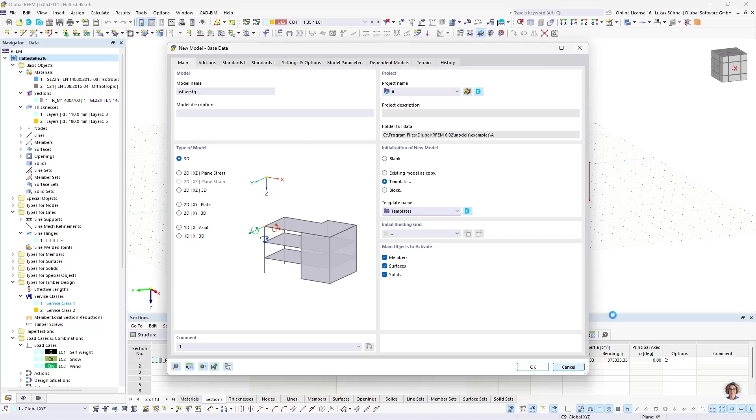You already have your load cases, combinations, materials, whatever you defined already. And that's the same logic that I use in Grasshopper. Before I run the export of the data that I defined here, I can read the information from a template. And I can link this template via the path.

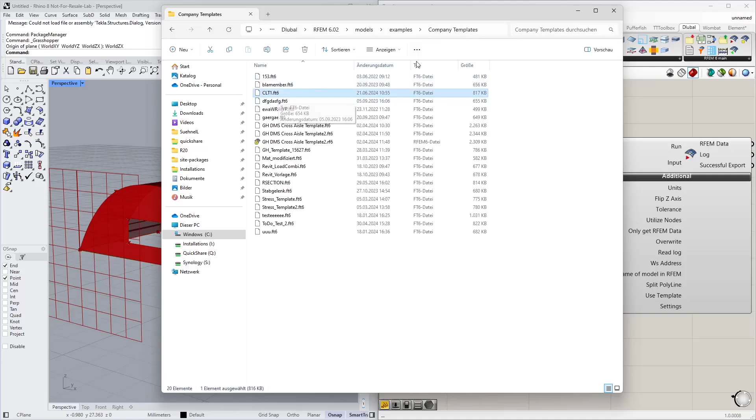So I go into my Windows Explorer. Now I have to remember where I put it. I think it's under the programs, Dlubal, RFEM 602, models, RFEM 602, models here. Example, I think company templates, and here's my template CLT1. So I copy the path.

Put it in a panel, add the CLT1 FT6. FT6 is the ending for templates of RFEM 6, and I link it to my template input. And now when I run the export, it will read first the information from the template and then the information that I defined in my components.

And since it reads the information from the template first, and I defined already a timber class in that template and a configuration for the timber design, I can assign, or I can simply use the index number of that type and assign it to my surface, to my member, whatsoever. So I don't have to define it in Grasshopper, but I can use it from the template.

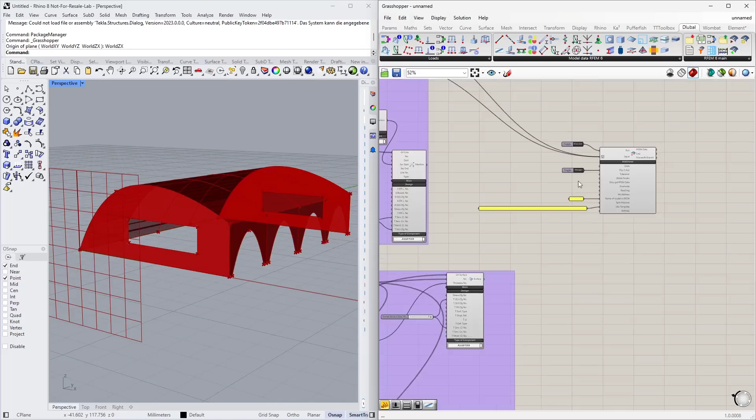Yeah, so far so good. Let me show the final, oh no, that's not the final, the final algorithm. We did all that here, and a part of the last group, yeah. These two definitions are missing due to the time. I think it's anyway clear how I did that.

And now we can run the export. And I would like to show that at least once. So let me put it on the right hand side. I close that file. And now, yeah, that's the path to the template. And now I can change it to true.

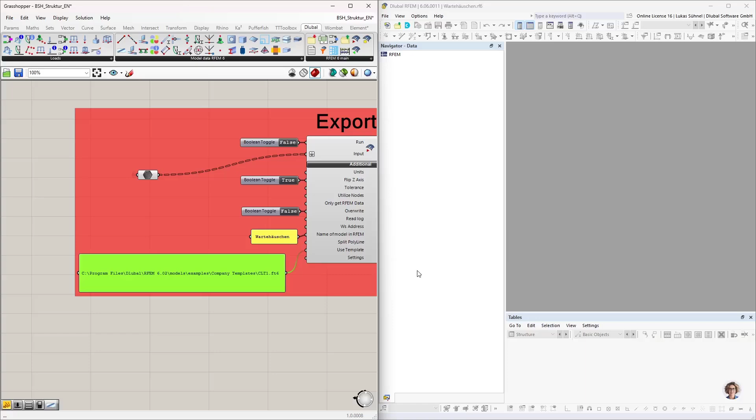And we should get the file in RFEM. It's creating a connection with RFEM. Reading the data from the template. You can see it already here. Load cases and so on are defined. That's part of my template. And then it will create material sections and so on based on the Grasshopper algorithm.

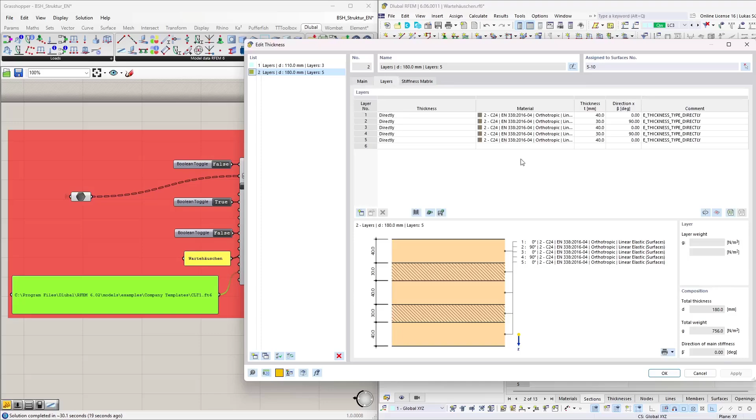All right. I disconnect the connection and I can see my file here. I have the geometry that I expected, my surfaces with the openings, my thicknesses with these layers that I defined before. Yeah, and that's already a file I can calculate. Let me maximize it for a second.

I can generate the mesh. In this predefined algorithm, I used the mesh refinement of 0.2 meters. That's why I have just 2 elements and not 3 over the width. But you can clearly see that the mesh refinement has been defined on these walls, except to the roof where I have the global FE mesh settings.

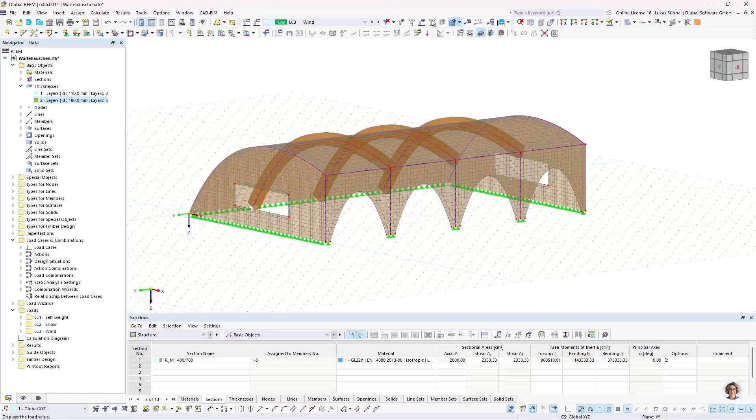And we can also see that I have here these line hinges defined, and all the things that I showed here. And if everything is fine, we can also run a calculation and we can get the results. And this step, running the calculation, can also be triggered via the Grasshopper component. Yeah, so that's also possible.

All right, that should be it from my side. I hope I was able to show you some new stuff, some helpful workflows, maybe regarding the numbering and the line hinges. And I thank you for your attention. In case of questions, you know how to contact us. And for the rest of the webinar, I hand it back to Andreas.